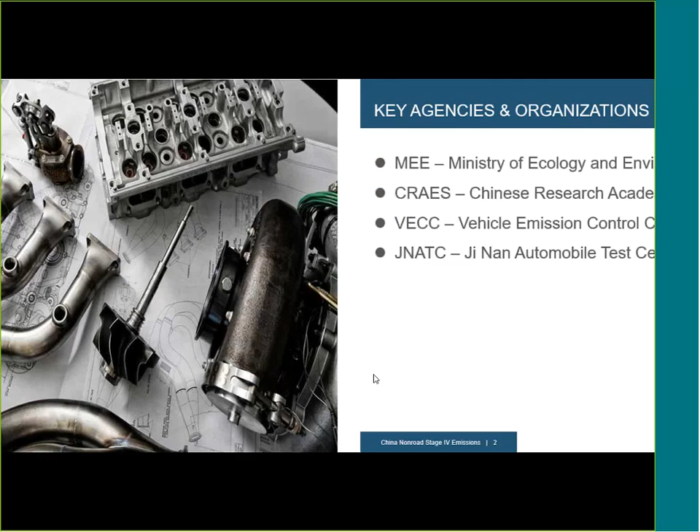When dealing with the non-road emissions work in China, here is a list of the key agencies and organizations you will most likely encounter.

MEE, the Ministry of Ecology and Environment, is the ultimate government agency responsible for all emission-related matters in China.

Second is CRAES, the Chinese Research Academy of Environmental Sciences. It's directly under the management of MEE and is one of MEE's major research arm institutions. Basically, all the final drafts of emission-related policies, regulations, and standards go to CRAES for the final round of review.

The third is VECC, the Vehicle Emission Control Center, which is under the management of CRAES. VECC is the enforcement center under MEE for emission-related issues, and one major work aspect for VECC is information disclosure, which we will talk a little bit more about on slide number 4 of this presentation.

The fourth is JNATC, the Jinan Automobile Test Center. It's a third-party test center, but because it has a quite close working relationship with MEE, and JNATC has a lot of expertise in technical matters as well as testing experience, this test center has been one of the most important major drafting organizations for the Chinese non-road Stage 1 to Stage 4 regulations so far.

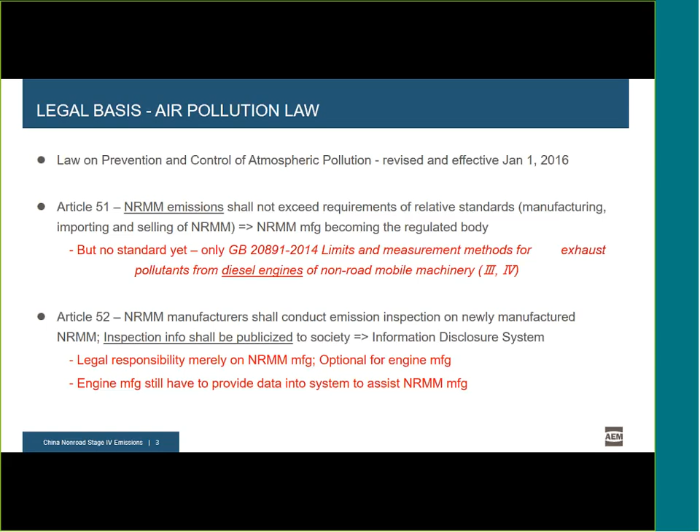To fulfill this requirement, we now have the so-called information disclosure system, which was developed by VECC under the direction of MEE. For information disclosure, the related legal responsibility now lies merely on the non-road mobile machinery manufacturer. As to the engine manufacturers, compliance with the information disclosure requirements is optional. However, as the engine manufacturer, you still have to provide data into the system to assist the non-road mobile machine manufacturer to be able to complete their data submission to the system as required.

For the information disclosure, here is some additional information you should know. First, the question is, who should do the information disclosure? This would be the manufacturer or the importer of the non-road mobile machines.

What is required? Certain labeling requirements are needed, and certain information needs to be publicized on the designated MEE online platform. The information to be submitted includes information on the non-road mobile machine manufacturer or importer who does the information disclosure work.

Secondly, it includes information on the non-road mobile machinery pollution control technology, specified in the GB 20891-2014 version, as well as information on the non-road mobile machinery emission inspections, including information on the type approval test, COP, in-use conformity, ex-factory inspection, etc. All the related details can be found in additional documents.

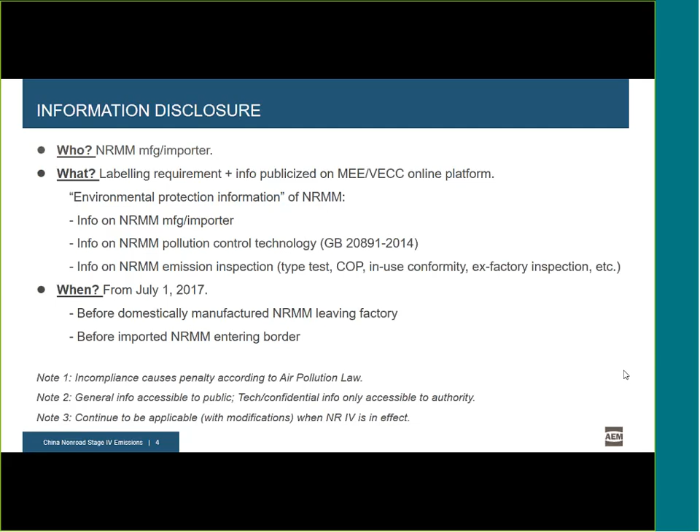Just now we mentioned that the GB 20891-2014 standard only covers engine-related requirements. So to accommodate the requirements on the machine side as directed by the air pollution law related provisions, MEE has been working on the draft of the HJ standard, meaning Mandatory Environmental Industrial Standard. The title of this standard is Emission Control Technical Requirements of Non-Road Mobile Machinery and Diesel Engine. This coming HJ standard covers requirements both on the machine side as well as on the engine side.

In the foreword of this standard, it says this standard specifies stage 4 technical requirements for pollutant emission control of non-road mobile machinery and diesel engines installed in machinery, and is a supplement to stage 4 related content of GB 20891-2014. So theoretically, when we talk about China Non-Road 4, it includes two parts: this HJ standard plus the GB 20891. However, in reality, for our working convenience, if we talk about China Non-Road 4 standards/regulation, usually we refer to this HJ standard.

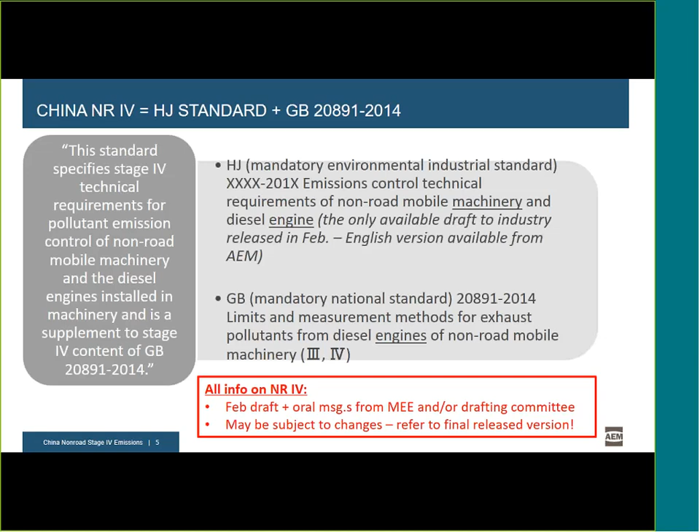Thank you for starting us off and giving us the background information that we need to understand what is going to happen next. As we go forward in the slides, you'll see that we're going to talk about the program overview of how China has created the Non-Road 4 program. It's not holistically different than the elements involved in China Non-Road 3, but there is a little bit of difference and enhancement in some of the program requirements.

As we talked about in the first few slides, the manufacturer of the engine and the machine will be required to comply essentially to the China Non-Road emissions standards, and Amy has done a great job of forming up how those two different standards are going to interact with each other.

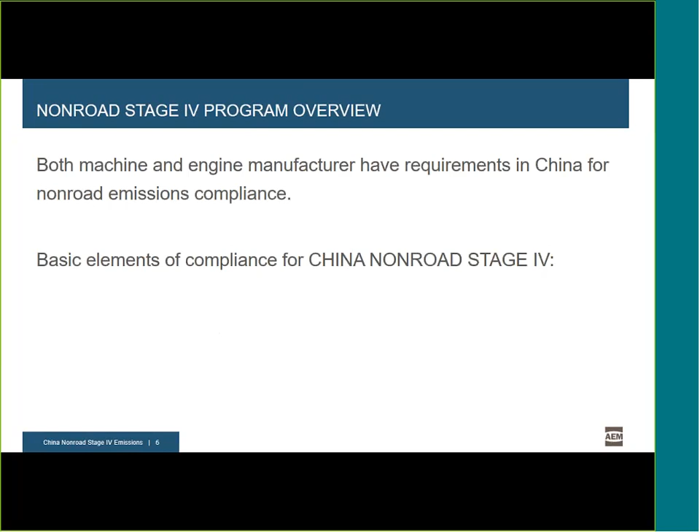What I wanted to do to start my information here today was give a basic overview of the basic compliance elements that are envisioned for Non-Road 4. Again, this is sort of conceptual at this point. We'll get into the details and the explicit requirements in further slides.

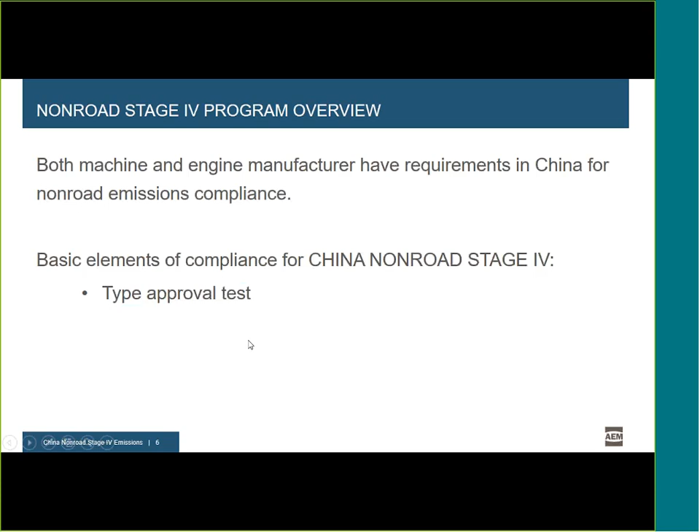The first item is the type approval test, which is essentially going to be very similar to what we have in Non-Road 3. We will obviously have to certify a more stringent engine that has after-treatment requirements, but generally the process for the engine manufacturers to receive a type approval will be pretty similar. There'll be some modifications, but generally speaking, it's similar.

The second requirement is production conformity inspections. I would consider this to be something that will also be pretty similar, mainly pulling elements from that GB standard that was referenced on the previous slide. We could see some additional things that could fall in this category, but generally this is going to be pretty similar.

Durability requirements, again, something that has been required in non-Road 3 and we expect to be similar in non-Road 4. Essentially, this is proving that the engine itself will maintain its emissions limits over the durability of the useful life of the engine.

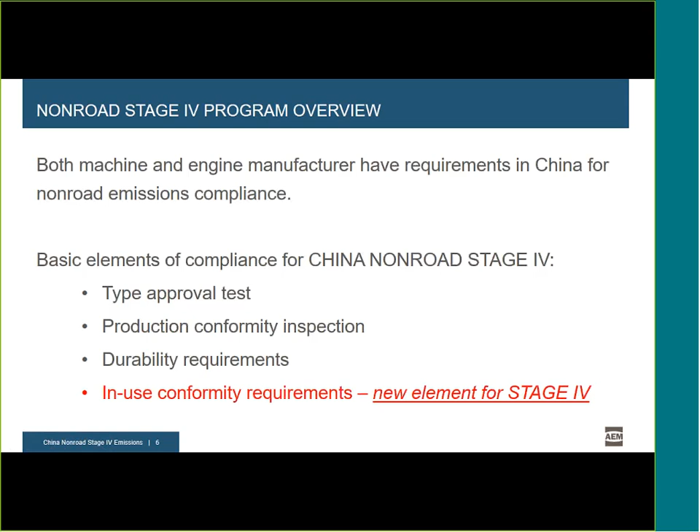The fourth element is a new element, though, in Stage 4, which is in-use conformity requirements. This is quite expansive. We're going to talk about this quite a bit in subsequent slides, and this is really where the program in China is going to start to differentiate itself from other programs in other regions of the world. So now if we go into a bit more detail, we'll talk a bit about the program's status and the basic elements of the non-Road 4 standard.

This is somewhat starting off with a repeat of Amy's comments, but the first comment is the draft of this standard. The only draft that's been issued for public review occurred in February of 2018. We were given a very short amount of time to form public comments for submission to the government, and AEM's China Work Group, Engine Committee, and other trade associations around the world, including Japan's, Europe's, and the U.S., all formed joint comments that were submitted to outline many concerns with the program that was proposed.

They have obviously gone through those comments. We've met and talked a bit with Jinan and VECC and CRAES on some of those issues. We've also talked to some of the key people at MEE, so we've done a lot of work to talk with some of those entities that Amy had talked about at the beginning of her slides. We now expect, as Amy just mentioned, the final version to be out very soon, but to be clear, it has not been published yet.

The items I'm giving you here are things that we have very strong confidence will not change before the final version is issued, but just be aware that some surprises may come up as we go through these lists. These main program elements are expected to stay the same.

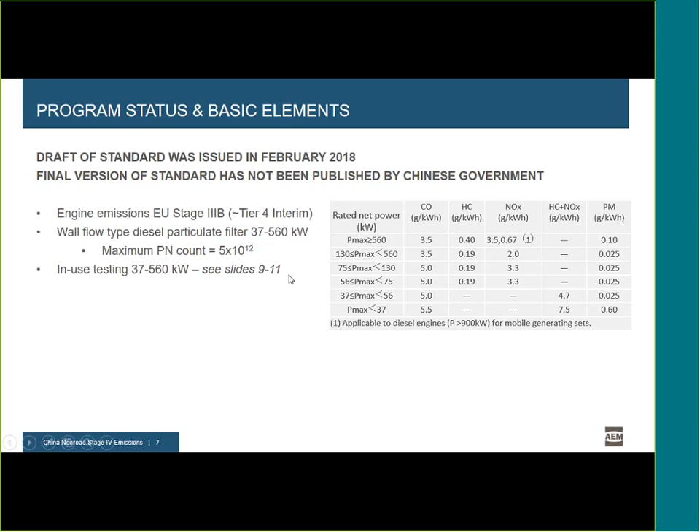So this is not going to be a pilot program with manufacturers required to submit data. This is actually a conformity factor that you need to meet in use, with a lot of different elements to that program. We'll talk about it a little bit more in a few minutes.

Smoke testing, the standard is a little bit confusing at this point in the draft because there is also a national standard that is going to be released that actually specifies the smoke standards, and Amy's going to talk a little bit about that at the end as she finishes up the presentation. So just be aware that there will be requirements for testing smoke and verifying the smoke standard is met with machines going into stage 4 product.

So it's a little bit confusing. We had a lot of discussions on this with the regulators. This will be clarified hopefully in the final version of the standard, but be aware there will be some elements of maintaining compliance to the national smoke standards as part of this standard. That is probably confusing, and it should be because of the way they've done it so far, but hopefully it gets clarified and we can gain better understanding when the final version comes out.

There will also be emissions component warranty requirements for manufacturers. This is confusing because you would think engine emissions components would be warranted by the engine manufacturer, but the requirements, as Amy stated clearly in the air pollution law, will be that the machine manufacturers have to warrant these components. So this is going to be a new element unique to how it's applied to machine manufacturers.

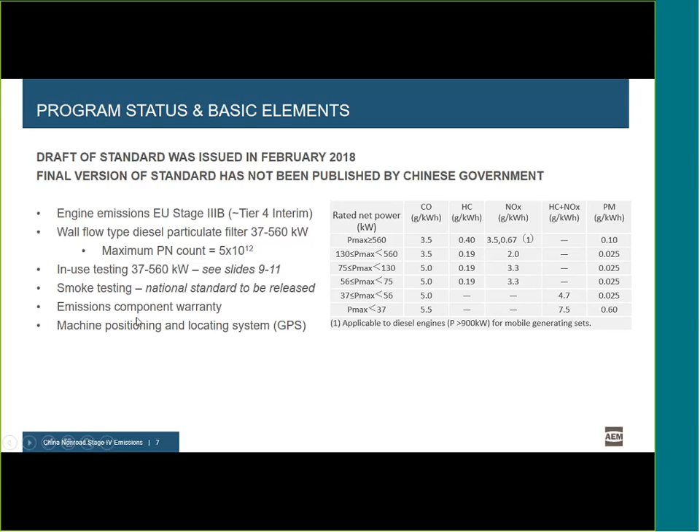The warranty program itself will be, as we've been told, aligned to the U.S. EPA limits. So in terms of years and hours for non-road machinery and non-road engines, this program should be very similar. But the entity required to apply the warranty for the customer and end users will be different in China. There will also be a machine positioning and locating requirement, essentially a GPS requirement.

I've included in this slide the national standard in China that is expected to be referenced. There is a lot of detailed information about how to meet the requirements for this positioning and locating system in the standard. It's available in the draft, and it'll be available in the final version. I'd ask you to please review that. This will be another requirement for the machines.

And this is basically something we question quite a bit. Again, it would be a unique standard not required for non-road equipment anywhere else in the world. But China has been insistent that this is something they need for their inspection programs and field surveillance programs they expect to have as part of in-use testing.

And the last thing we wanted to talk about is the transition period, or in this case, the lack thereof a transition allowance. So no allowances for production, importation, or sale to an end customer of any of the previous stage machines after the introduction date.

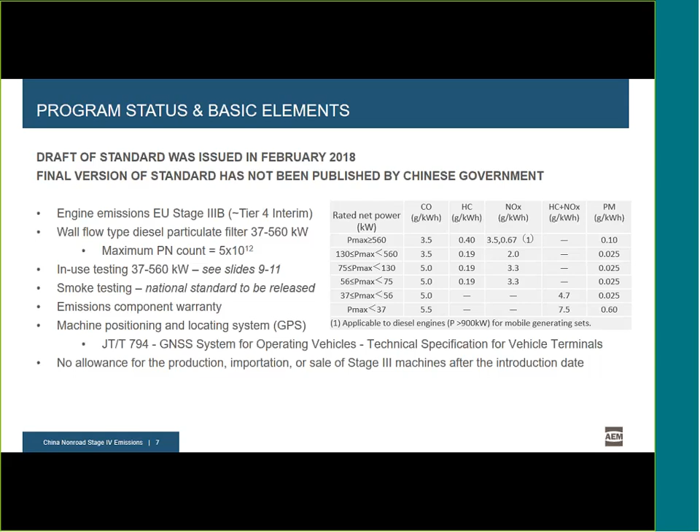And as I think Amy or Mike have mentioned already, the introduction date is quite near. Just about 16 months from now, you're looking at full implementation of this standard across the board in all power categories. And of course, no transition period, as I just mentioned.

So we have our work cut out for us. If you're lucky enough to have a solution off the shelf to meet these requirements, you're in a very good position. But for companies and manufacturers that will need to develop products to meet these standards, you have a very short lead time to accomplish that. And again, we still do not have the final version of the standard ready at this point, so we're still waiting to know exactly how some of the details that go along with these program elements are going to fit in.

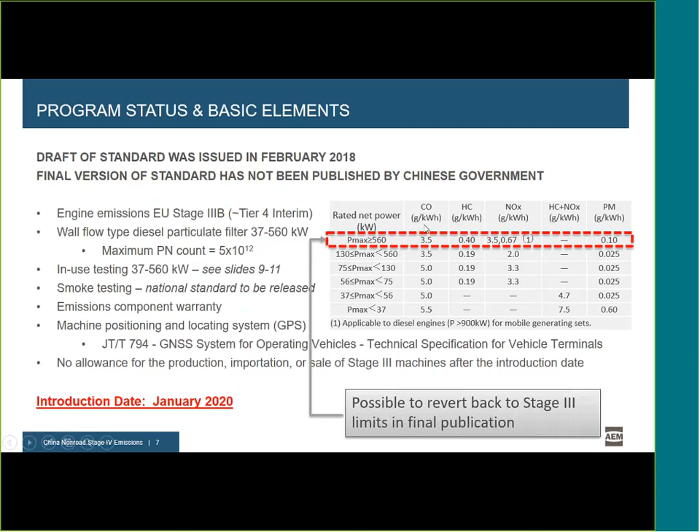One thing I did want to mention here, probably the only thing that's going to potentially change, is the power range above 560 kilowatt. It is possible they may revert back to a stage 3 limit value in the final version of the standard. This is something the industry has advocated for fairly strongly, and there has been some verbal feedback this is possible. So please keep your eye out when the final version comes out on what the eventual final requirements are for engines above 560 kilowatt. And again, these standards are in the GB standard that was referenced earlier.

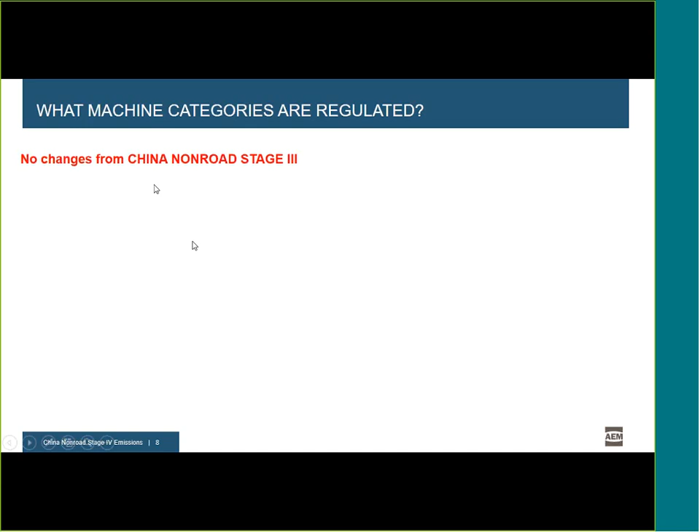The next thing we wanted to cover is what machines are going to be regulated in this standard. The answer here is actually pretty straightforward - there's no change from what was covered in Non-Road 3.

For your purposes here and for your note-taking, if you'd like, we have included those categories both for variable and constant speed engines.

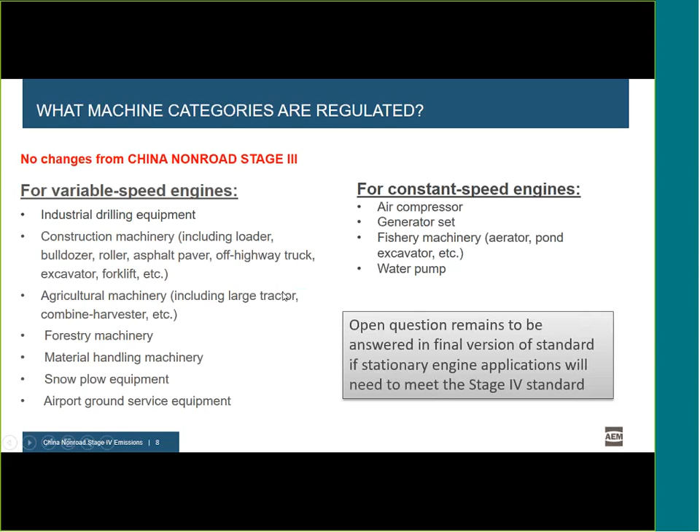The one thing I would like to mention in this box on the slide is a reminder that stationary engines are not yet confirmed to be included or excluded from this standard. The Stage 4 standard originally was intended to cover stationary engines, from the discussions we've had with regulators, but they've had some moments of indecision about confirming that. So there's an opportunity, if you want to call it that, that stationary engine applications may not be included within the scope of products regulated under the Stage 4 standards. We'll have to see when the final version comes out.

Now we'll move on to talk about the new program element, sort of one of a kind - it's only of its kind in the world. The InUse and self-inspection program that China is putting out is again different than the European in-service monitoring program in many ways.

There are some things borrowed from that program, but we wanted to first go through how the program is set up in China, and then talk about what's unique and what's shared with the European program, so people have a good understanding of the technical elements, but also the programmatic elements that are going to drive how many tests are actually done.

First, for new machines - and I have the word 'new' in quotes here mainly because the definition of the word new is not understood from the draft regulation. But in discussions we've had with the regulators and drafters of the standards, we believe we understand what that new machine definition will be. This again is something that machine manufacturers will have to take care of.

This self-inspection plan first starts with emissions testing for new machines using PEMS equipment. So taking a machine off of your production line, perhaps selling it to an end user, letting the end user run the machine, and then within a certain allowance to consider it still a new machine, running a test to confirm the conformity in use of the machine.

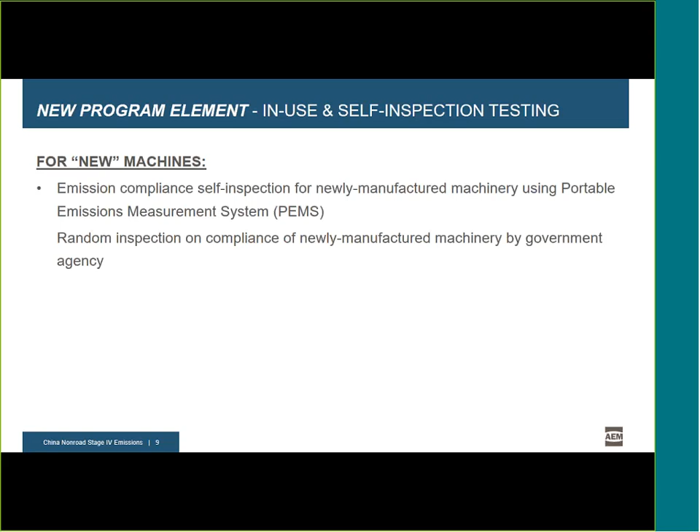The second part of the self-inspection program is a random inspection by government agencies. This can include visual inspections, maybe in the field - going out to see does a machine have all the after-treatment components listed in the engine manufacturer's type approval, for example. It could be something about how you look at the machine manufacturing process and ensure all emissions components are installed. There could be various things - it's not explicit what a visual inspection really is.

The inspection of production line testing and the data, of course, needs to be stored for a certain amount of time. That's all included in the specific details of the standard.

And then there are also emissions tests that can be conducted by government agencies, sort of like a surveillance program of new machines coming off your production line. That could be taken to a test lab - they could run an engine itself in a lab to see if the numbers match the type approval, or it could be a PEMS test where they run the machine in the field to get information and data. So it could be a very wide-ranging program.

Now, we want to be clear that we're not 100% certain of the government's intention in executing all these elements at any frequency or total number of tests or inspections per year. I think they've told us verbally they'd like to ensure they have the ability to go out and inspect and survey machines in the field, but I don't know that they fully appreciated how overwhelming these requirements are when you read them as listed in the standard.

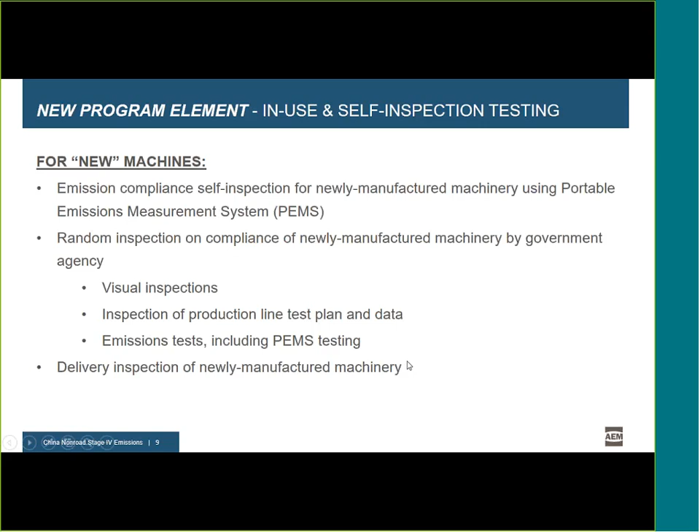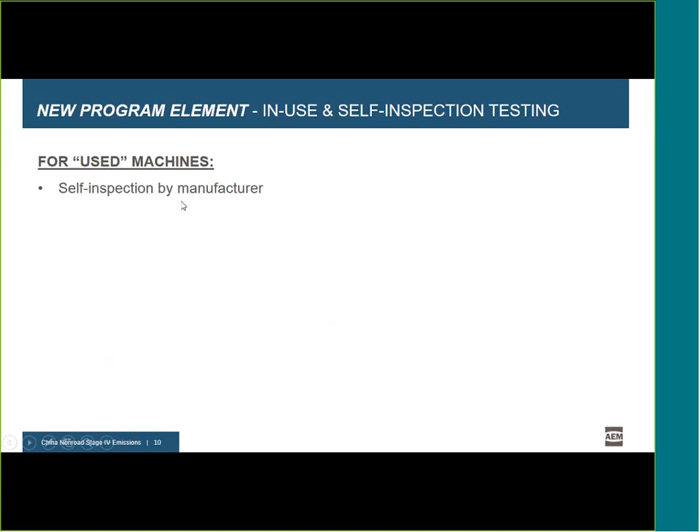So that's only one half of the program. You also have the program for used machines, and again, used is in quotes here because we need to fully understand the definition of what constitutes a used machine. We'll talk about that in a little bit. For the used program, we also have the self-inspection program required for manufacturers. We also have the random inspection by government agencies.

And we also have corrective measures for nonconformity. So I've tried to use the words on both the previous slide and in this slide of what is actually listed in the draft standard. So you can go look at that, and hopefully the language is somewhat similar. At least the wording they use can be somewhat similar in the final version. So you can kind of point to these things in the standard when you have a chance to review it.

And kind of match this up to the actual language in the standard. So this language is maybe a little bit strange for how we would normally characterize these requirements, but this is the wording that was used in the China draft standard. The nonconformity corrective measures could include recalls. So this is something where, for example, you run a test, you don't meet the requirements, and you fail the test essentially, and then you would get into a discussion with the authorities in China about how to rectify that. You could institute a recall, you could do more testing.

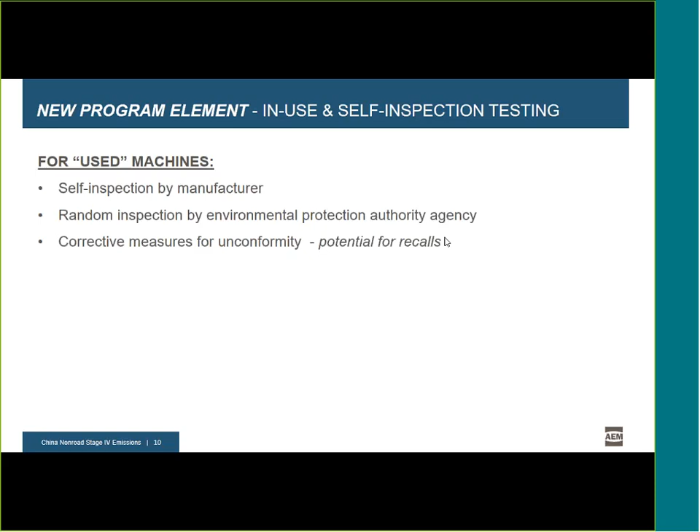It really is a negotiation at that point, I believe, but it doesn't limit itself in any way. It could be a potential for a fine, penalties, recall requirements, things like that. So be careful and understand exactly how the scheme works in China for passing the test. How many tests you need to run is one thing, and how many tests you're supposed to do and what records you're supposed to keep.

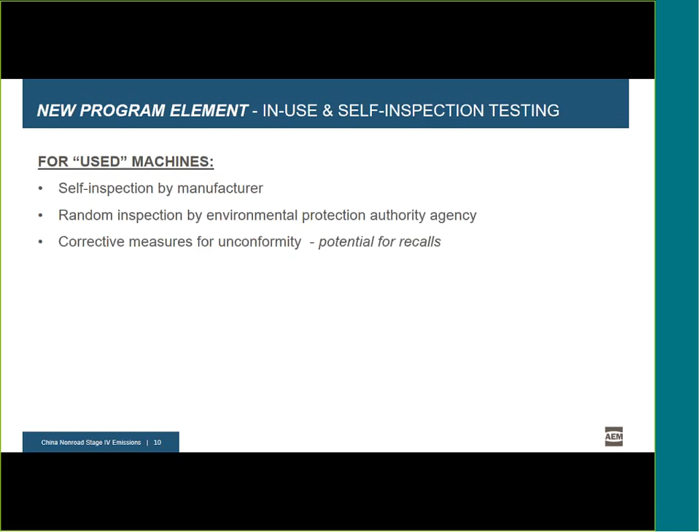But another element of this, and of course this is beyond what is required in Europe, is you can fail a test, and then when you have a nonconformity, you would have to potentially rectify those nonconformities. So keep an eye out on those requirements. There's detailed information in some of the annexes of the standard that explain not only how the testing needs to be conducted, but of course what measures are needed and frequency of testing and how many tests you need to pass, things like that.

So some additional info, that's really just a black and white version of what's required for new engines or new machines, versus what's required for used. The one thing I should probably also include here is very key, and I've withheld this information until now to not distract you too much, but this is a key element. The NOx emissions cannot exceed 2.5 times the applicable limit for NOx when you're running your PEMS test.

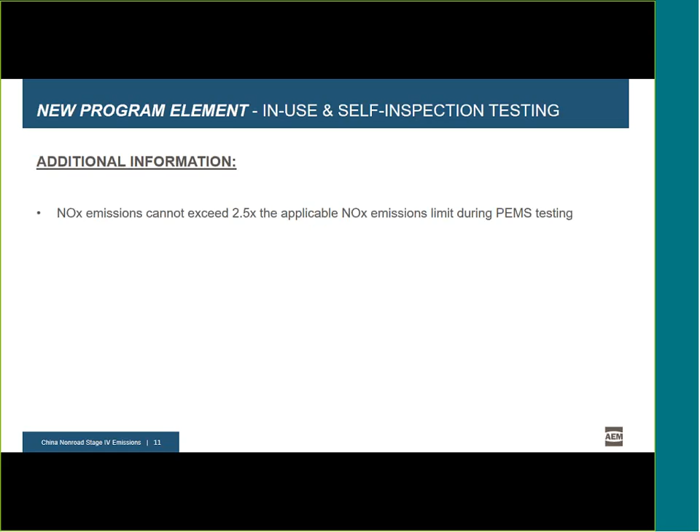So the In-Service Monitoring program in Europe, the procedures are basically adopted from that for China. The threshold that we expect to see, and hopefully this will be explicit in the final standard, is 500 hours. Under 500 hours would be new, above 500 would be considered used.

When you get into your used program, you actually have to get a program. At this point, we're expecting to have the program for each manufacturer approved, or the plan will be approved by the type approval authority. So, probably putting a range into what number of hours and which machine families and engine families you're looking at will be included in those sort of documents.

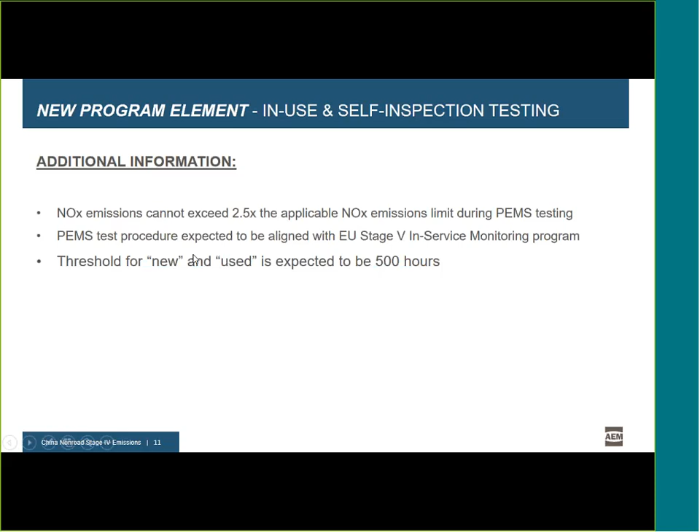So we're not sure if you can just run an engine at 501 hours or 499 and sort of keep doing that and consider it new and used. We'll have to see if they explain that further, but generally this is the expectation we've gotten through our discussions.

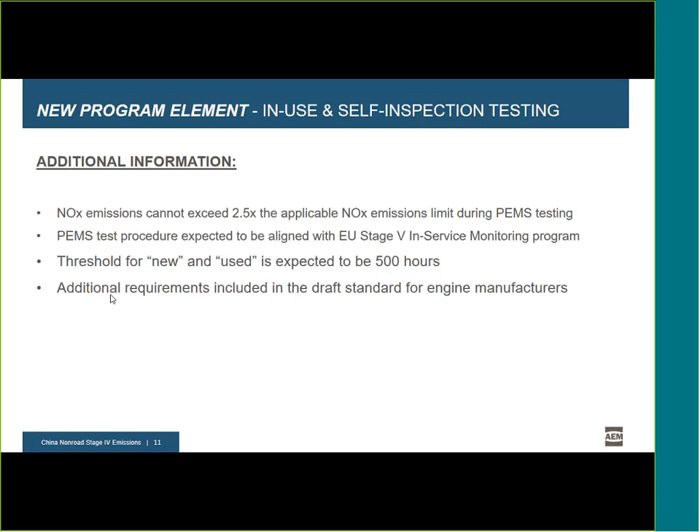The indication we've received from the Chinese government is they may be willing to reduce some of that burden and narrow the test requirements to ensure two basic objectives: the ability to survey and locate in-field used equipment, where GPS comes in, to do their own testing and monitoring, and to require manufacturers to do some testing at infrequent intervals at minimum, so the program may be better able to expand in the future.

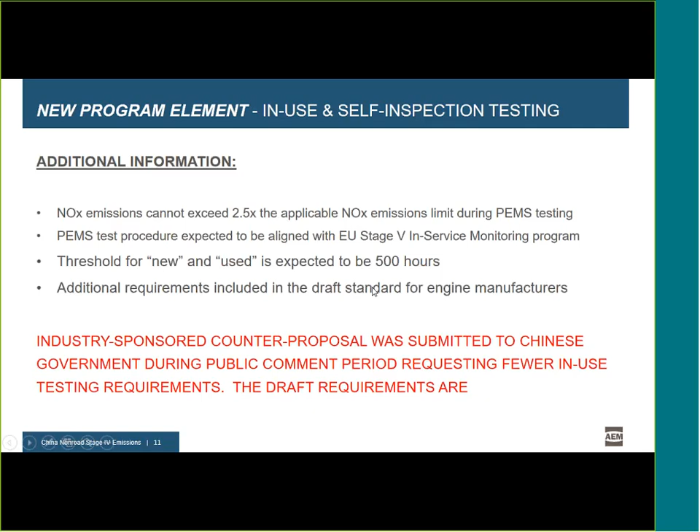So these are the last things I wanted to mention about the standards, and I will pass it back to Amy, who can talk to us about some of the smoke standards I referenced earlier and conclude our presentation today. Amy, take it away. Thank you, Chris. Very comprehensive introduction of all the key elements.

It is actually mentioned in Chapter 7 of the February draft of the HJ standard. It mentions some smoke-related requirements, which refer to one mandatory national standard MEE has been working on, titled the Smoke Emission Requirement for Non-Road Diesel Engine Machinery. According to MEE officials, this national mandatory standard on smoke requirements is also in its final approval process and will be released very soon.

MEE expects that, if everything goes right, this GB standard on smoke requirements should be released earlier than the HJ standard, because the HJ standard refers to the requirement of this smoke standard.

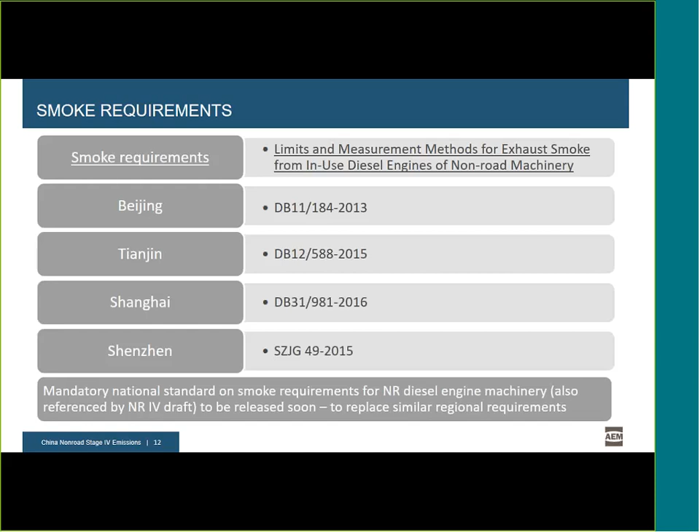At the end of August this year, MEE released a very important guidance document titled Technology Policy on Non-Road Mobile Machine Pollution Prevention and Control. This document states that non-road mobile machinery with compression ignition engines shall reach National Stage 4 emission level in 2020 and integrate with the worldwide highest emission level in 2025.

By mentioning meeting the National Stage 4 emission level in 2020, this fact echoes the implementation date mentioned in the current Non-Road Stage 4 draft. We think this has something to do with the very difficult lobbying process we've had with the Chinese regulators, when we mentioned that the introduction date for both engines and machines to meet, as of January 1st, 2020, will not be enough time for manufacturers.

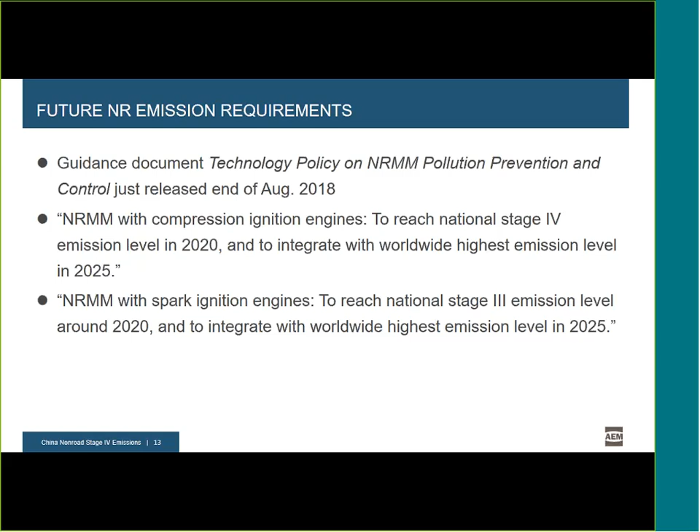But the Chinese regulators have been very insistent on having the date at least in 2020. So again, for any final information, including the implementation date, please wait to see and refer to the final release of the HJ standard, as we mentioned before. I believe this is all we have for today's presentation.

And Chris, do you have anything to add or comment on? No, I think we've got it all covered. Thank you. Excellent. Well, thank you, Chris and Amy. This really has been a good comprehensive study, and recognizing that things are subject to change on the short time frame that we're at.